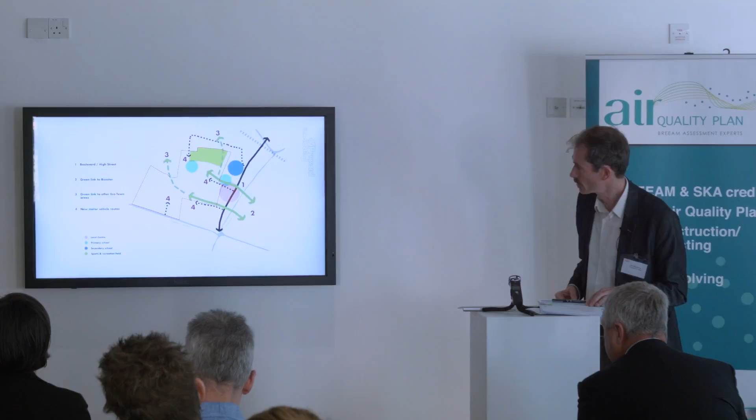And then within there, the key characteristics that we picked up on from the Farrell master plan were really these various. You probably can't read the text on the left, but the numbers here, hopefully you can see. One is the creation of a new boulevard to connect the east of the site, and positioning various schools and other local shops, other community facilities. They're the blue and pink blobs there.

And number two then is new pedestrian and cycle links connecting to wider Bicester. Three is the large green space to the north of the site for playing fields, not within the school, but for recreation by the whole area of the ecotown.

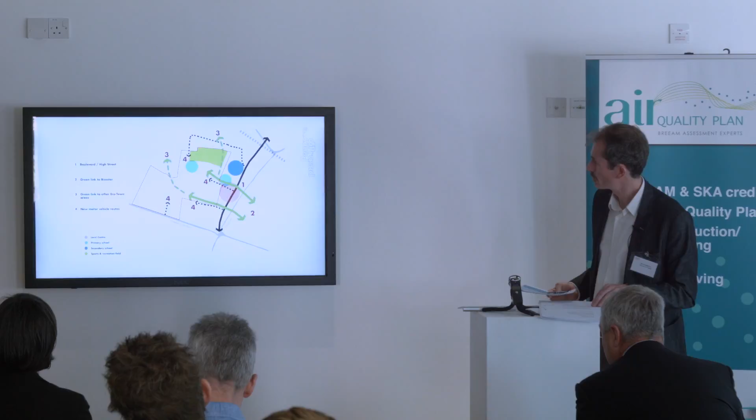Road connections of 4, and 6 isn't on that. Okay, don't worry. But the idea then was to pick up on those, but how we picked up on it,

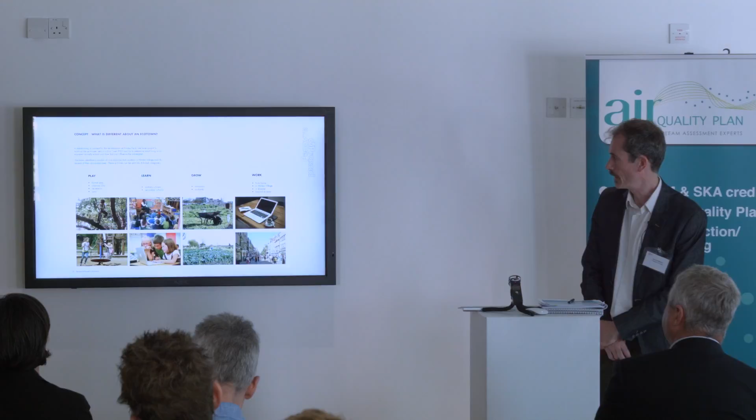we went back and just thought, wait a minute, what are we actually trying to achieve here? What would be seen as a healthy way to consider inhabiting, living, picking up on some of the speakers from this morning, from Joe's overview about health and well-being, really looking at the activities that would take place within the ecotown and what might occur outside,

and how would one, there's no point in pretending that everybody would just live there and not travel, but actually how does one create a center of gravity there that makes people want to be there. They don't sense that life is elsewhere, but obviously for certain things, foreign holidays, etc., it is elsewhere, and there's got to be good connections for that.

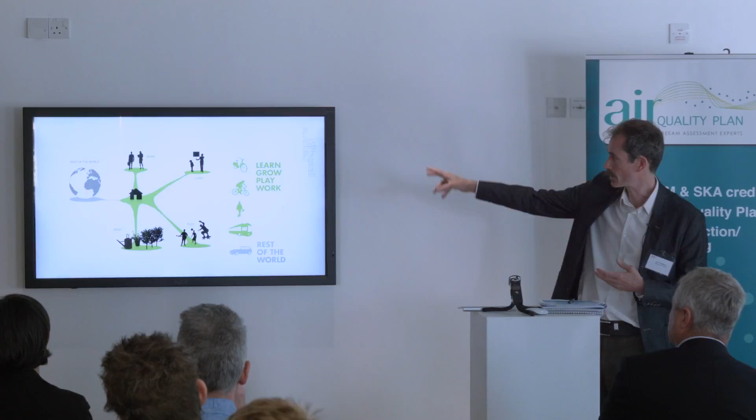But conceptually, to understand it, where play, learn and grow are really key to happen within the ecotown, work as well, but then it may be work is also in Bicester itself or beyond Bicester, and those connections need to be considered. So the conceptual framework for us was really very much that everything in green there is what happens within the ecotown, but then that connection to the rest of the world is facilitated, and is facilitated in as low carbon a way as possible.

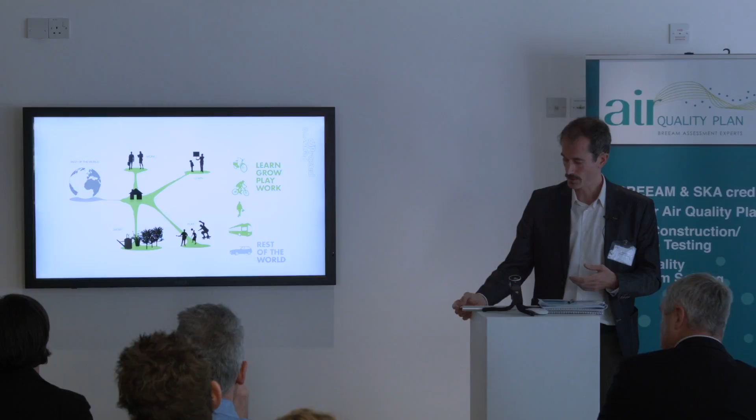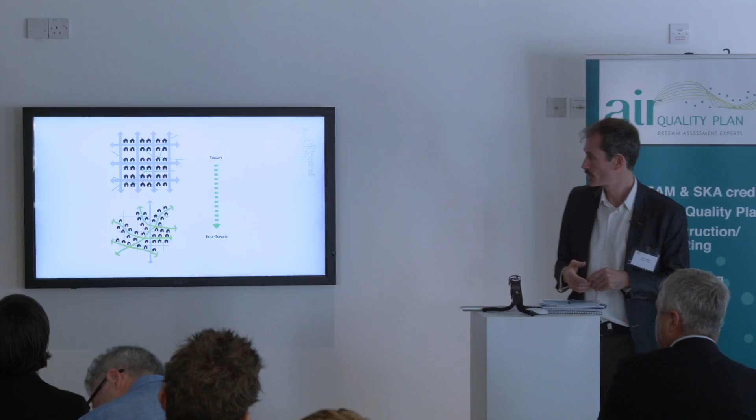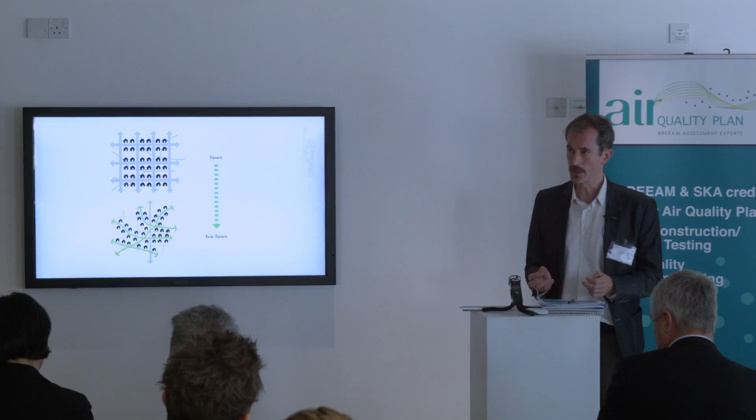In terms of infrastructure within the site, we were working with Metropolitan on that, looking at low energy and appropriate utility infrastructure. So spatially, that concept really of how to live in this area and how to value the natural capital of this site, and to work within the planning guidance for ecotowns, really led us to look very closely at the green infrastructure, and to really subvert that diagram at the top there, which is always driven by highways, car,

facilitating arriving and leaving one's own house, which often we know creates a series of unfortunate boundaries, to use Richard Sennett's terms, where one is actually cut off from one another and from green space, etc. Instead, we work very much with the green space as the key routes for movement through the ecotown, and any roads were all very much secondary, so that one's perception is always of the green.

40% of the ecotown had to be open space. We took that much further and looked at densities, but also the perception of that. So it's not just in the exact area, it's also in what's your physical perception of green space, you yourself, where you live, how you relate to it. And I think that the experiential is absolutely critical and is often forgotten by those that are planning things out

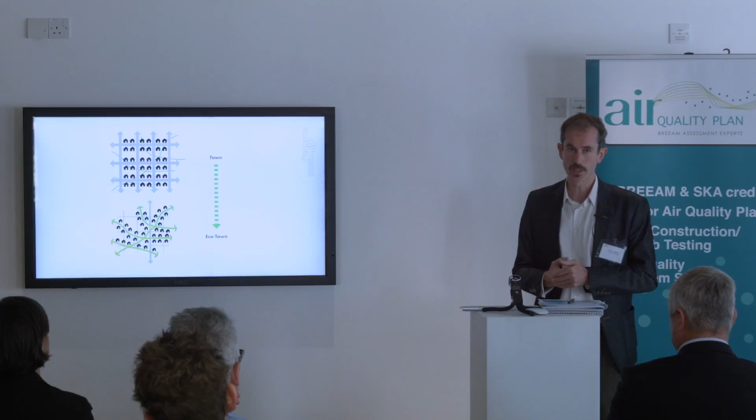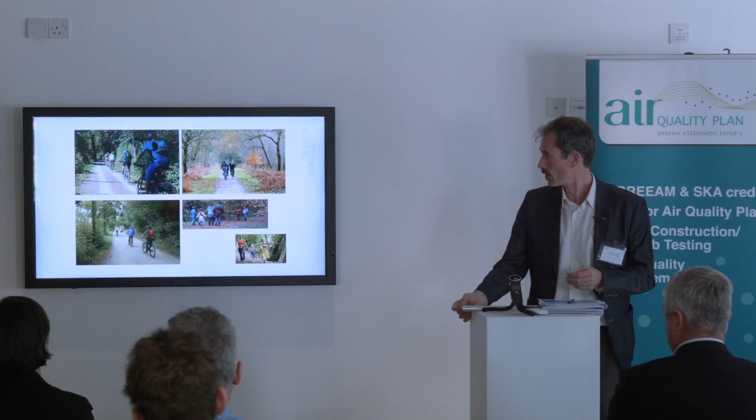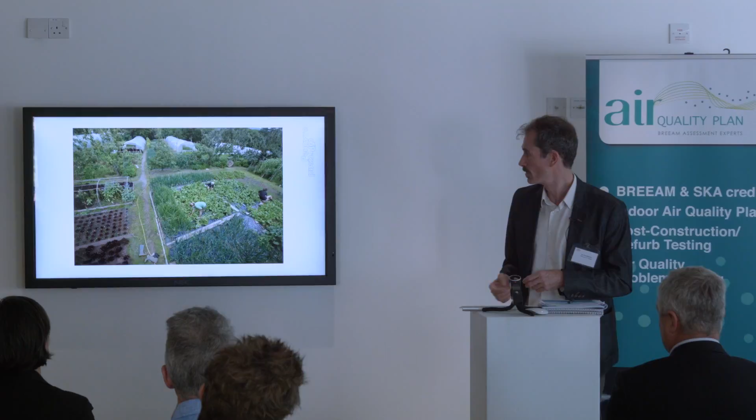from a statistical basis. So really looking at all the various opportunities that were on offer and how to best use that infrastructure. There's something like within our site 4 kilometres of hedgerow, and the hedgerow then became a key starting point to looking at the site.

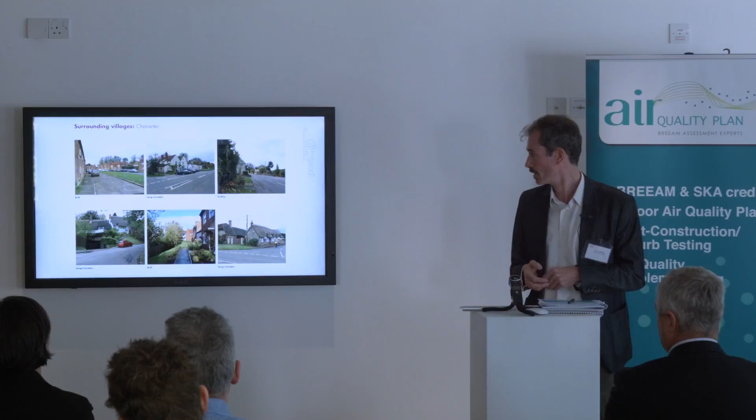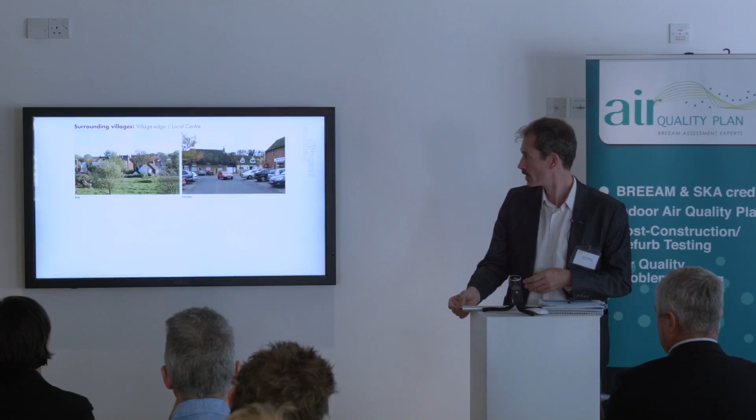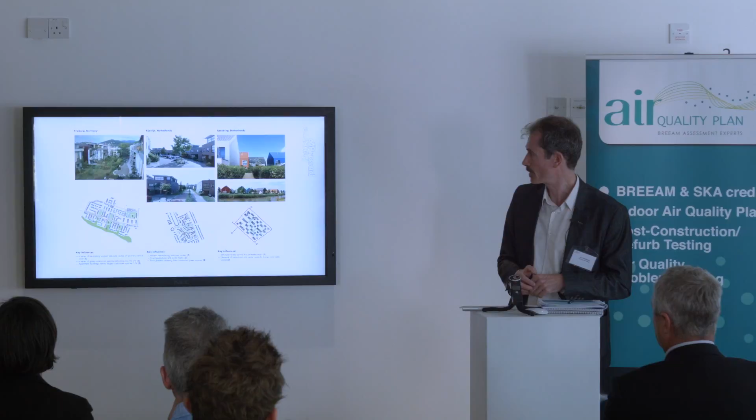But before we did that, we really studied the surrounding villages and the character of those, learning from good and bad, as I mentioned, cars, etc., but also how some of the boundaries between houses work, an edge of town, edge of village, the centre, and then studied a whole range of new towns and how effectively they've or not managed to create new neighbourhoods within towns. There's quite a lot to talk about, so I'm kind of paraphrasing some of these, but happy to talk about it in more detail later.

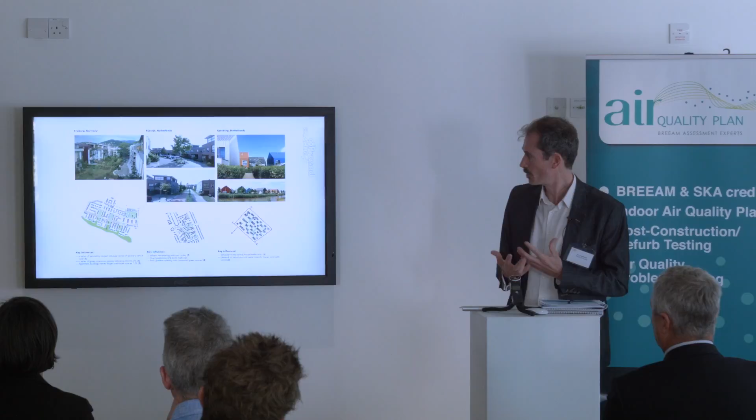So some which are creating mats of housing, others were more successfully integrating green into the housing mat. But we then really sort of thought, okay, let's look specifically now at this piece of land and let's actually understand it systemically. Take a look at it all from the different systems there.

So starting with the contours of the site, and then the hedgerows being absolutely critical for the biodiversity of the area, to preserve them, but where we are just starting to make cut-throughs to facilitate... we don't want to create boundaries. We want to have borders through which people can actually... porous borders rather than boundaries, to use Richard Sennett's terms.

I mean, it may just be helpful to elaborate a little bit because it was a key conceptual framework underneath, with thinking about what Richard Sennett from the LSE... he's made a huge contribution in understanding post-industrial urban space, and really saying in his analysis that the role in managing the relationship between people and communities has greatly been helped by his piece of study, because his way of looking at borders and boundaries seems relevant to social organisation as well as physical space.

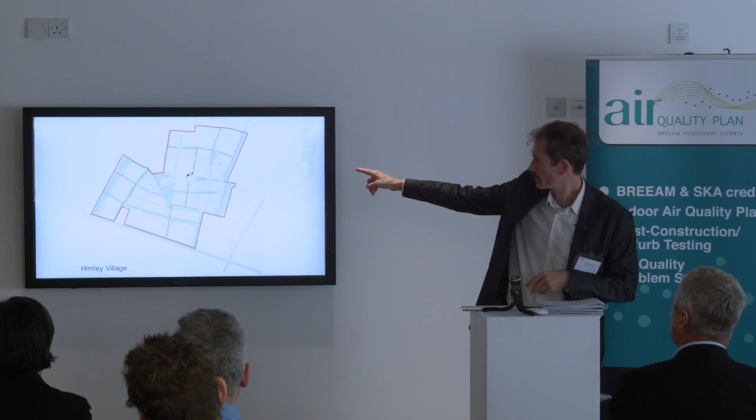And the streets then are overlaid on top of that, but as I say, very much within a secondary role, with the green ways being the primary role and primary routes. The black is an existing farm at the centre, which we're looking at how that is taken over into community ownership. Large growing programs, showed images earlier of allotments. That is a major part of the thinking behind the growing in the locality, which is then avoiding those lots of trips to Waitrose, etc.

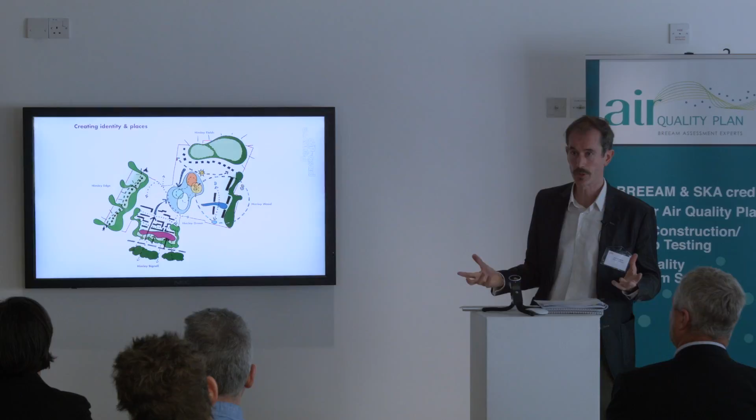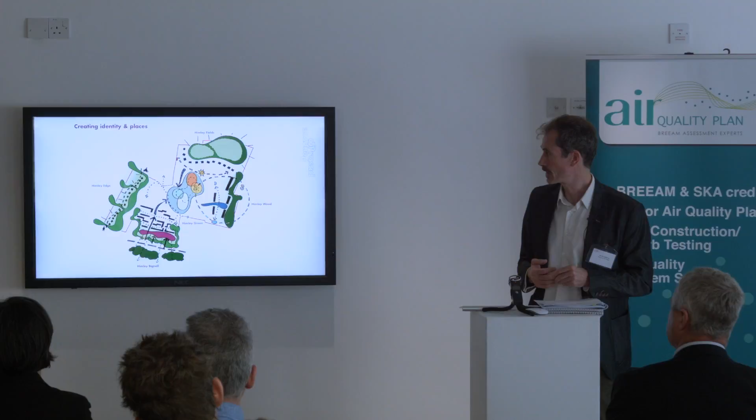And then creating identity within the ecotown, rather than having a monoculture of experience, really trying to create different identity. So this is back to placemaking. If we're not achieving proper placemaking, we're failing, because it turns into a place where you have a sense of the world is elsewhere. You know, one has to think of all the ages that would be living in this ecotown, and one doesn't want to just create a place which becomes somewhere teenagers don't want to be, somewhere people are just frustrated and also don't have a sense of their own identity within quite a large area.

So we worked closely on that, and then this is really where we arrived at, which is probably too small to see there, but this is after a lot of study about density, what areas. We've got varying density within the master plan, possibly easier to see something of that back there, where we're creating more density around the south and the east, and just thinking of different house types. We haven't actually developed those house types very far, but one would be hoping to develop those once we've got planning in much more detail.

We're very much thinking all the time about the quality of the places one's creating, whether they're dense. When I'm saying dense, it's this level of density rather than what we'd be talking about in an urban area. But one can see actually quite dense in areas, with thinking 3 stories, 4 stories in some areas, but generally 2-story.

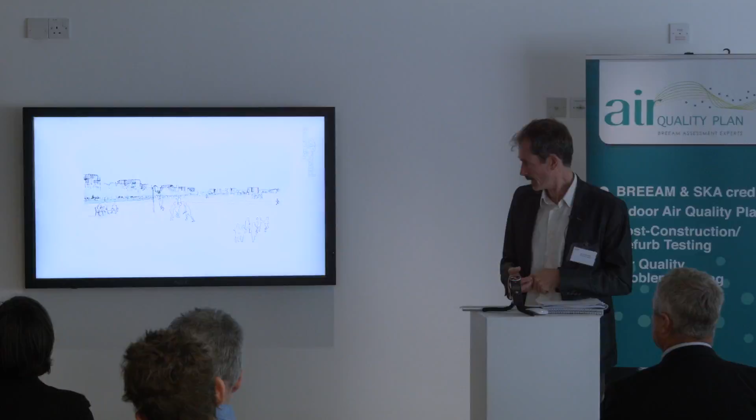And that's often the risk with eco-towns, where they have started to go. Not that there's many left, I think there's 4 eco-towns still on the table. North-west Bicester has been constructed. I haven't visited yet, but it's some of the photographs from that. I'd be interested in anyone who has visited there, but it does feel slightly suburban.

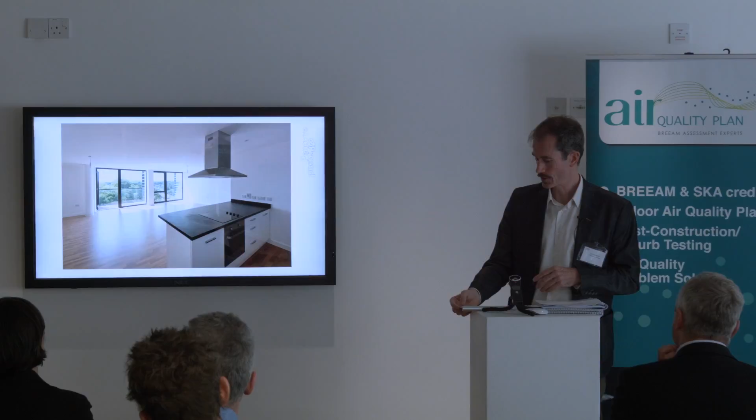So that's really where we've got to so far, and I just wanted to conclude by saying if there's one thing that would characterize the experience of living at Himley Village above its other very worthwhile qualities, that would be the close relationship between the natural and the built world. The land with its hedgerows, its wildlife, its water and its fertile soil is abundant in life-enhancing gifts, providing the design of the village is open to them.

The run of the hedgerows, the track of the water over the contours, and the nature of the edges of the site have guided the organisation of the flow of people, vehicles, energy and waste, and the positioning of the buildings and private and public space. Together, these influences have led to the creation of a clear identity for the village as a whole and a strong sense of place in its neighbourhoods.